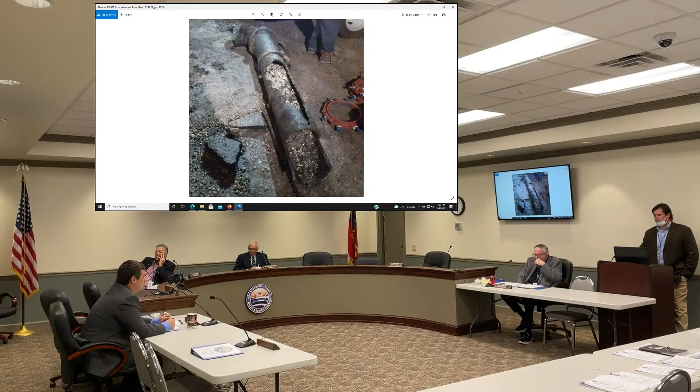But that's a picture from a couple of years ago, would you say? A year and a half ago?

How deep is the current force main? It's 4 feet, something like that. Does heavy equipment going down that road affect it? Yes, theoretically it would, assuming it's not compacted properly.

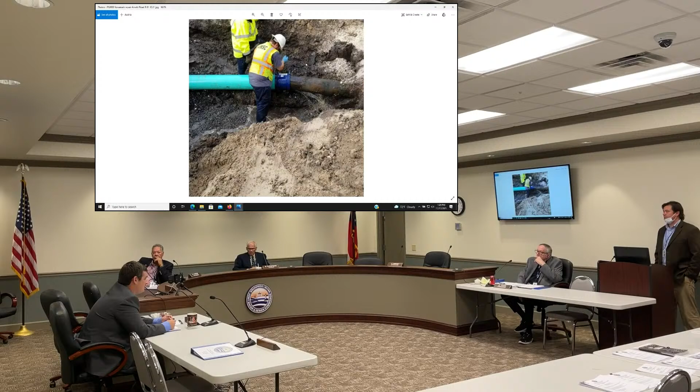Vibration on thin wall - that's from cast iron corrosion. This was most likely caused by corrosion issues, but of course all that vibration, knowing the shape it's in, is making more issues for us in that area.

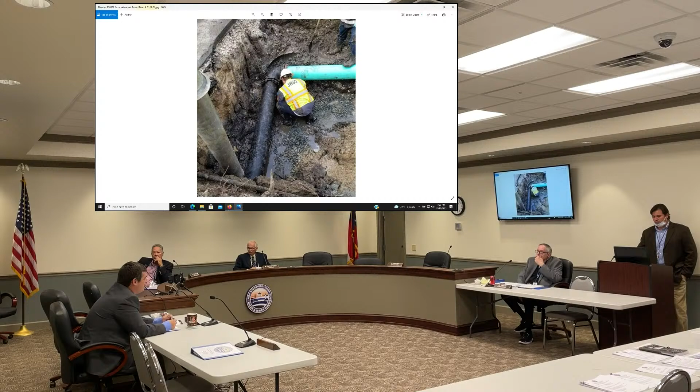Where are the breaks located? If you can pull it up - you see one right there. Pump station is right there. That patch is the most recent one that blew out - it's near Fiddler's. And then it actually blew out inside that patch, and we had to patch the patch.

Okay, what about if we send that smart ball through it? And see before we spend any more money on this. We could absolutely do that. I'm sure that Mr. Stewart, or I guess he's still doing those, would be happy to give us a price on that. Okay, before we continue our conversation, can we have a motion?

I'll make the motion. I'll move that Facilities Committee recommend the full commission reject the bid for IFB number 22-012 pump station 2002 force main replacement due to insufficient funds being allocated for the project. I'll second the motion. I think we need to revise that and just say reject the bid instead of all bids, since we only got one bid. Okay, I'll support that.

Is there another way that we could get this done? I think about working with contractors that we have on property now, and that we go to them and add scope to a project, because we have people mobilized already. Perhaps we could put the pencil to that and see if that's an option, to look at it and negotiate the cost for the scope change on another project. And perhaps if we can do that, my thoughts are if we're successful, we could still keep this on track in terms of timing to get it done before spring.

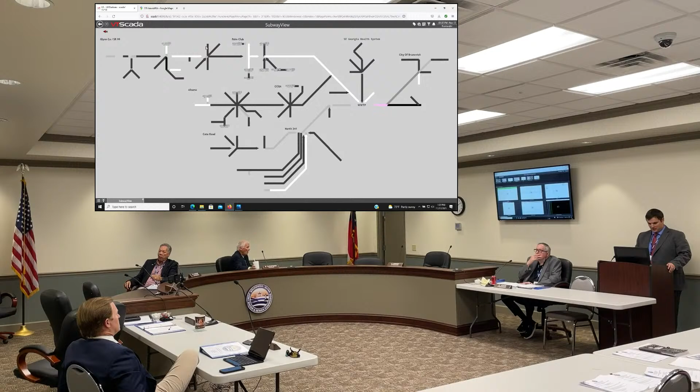So this is the full screen here. Then I want to show you this. We have what's called a subway setup, and it looks like a subway map. This shows you the layout of our system, and again anything that's in white is pumping, including those force mains. So we can tell exactly where flow is going through the force mains in the system right now.

And why is that important? Well, if you have something occur downstream, particularly if you've got newer staff online and they don't know the system very well about what needs to be cut off, if we know downstream there's issues, we can follow this back upstream and turn off stations that are necessary.

It also helps explain why when we upgrade pump stations, we take into account, like station 4028, there's 3 or 4 pump stations that pump into that, so we account for all that when sizing these. If we go into individual pump stations, we have this for the whole system. This is the city in North Mainland, this one labeled SSI is St. Simons, and down here is South Mainland. We have a substantially smaller system at South Mainland, so we were able to fit it on this page and cut down the number of pages.

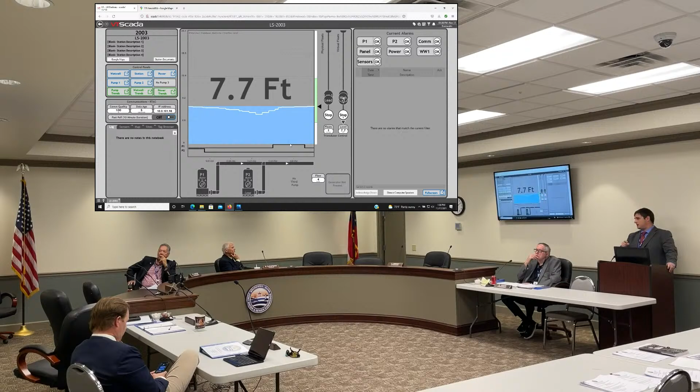You can see these pumps that are running currently and as such. Let me zoom in here to one of these pump stations as soon as I can find the one I know. Okay, pump station 2003, this is back in Oglethorpe Point.

If you go to every one of these pump stations, they all have individual pages that look like this. Some of them have radar devices, which this one has. You have floats as a backup, and we also have radar devices that tell us the exact flow. So there's currently 7.7 feet of water from the bottom of the wet well in that station.

Now what I can do is go into this pump, click on pump 1, and force it to run. This isn't very exciting because it takes a second to click in, but I'll override it, so I turn that pump on by hand, and in a minute you'll see this start to pump down. It takes some time for the communication to get there to turn it on, but you'll see this number start to drop.

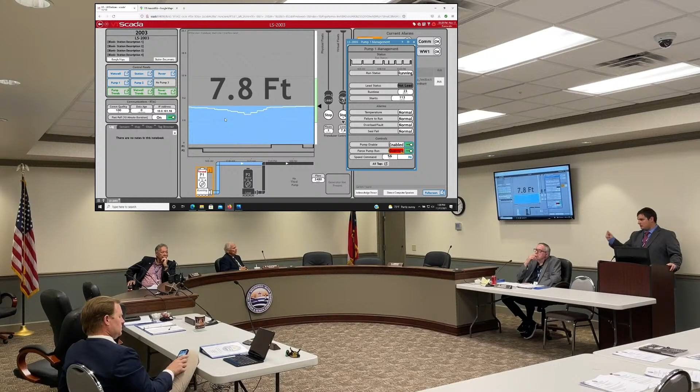Is this cellular-based communication? All cellular-based. Every station has a cellular modem at it. Previously the way we did our communication was via radio, so they all go to one collector point. If a collector goes down, we may be blind for 15 stations. Now we would lose one station, not lose it, but we just wouldn't be able to see one instead of not being able to see 15 at one time. So we pay a cellular phone bill at each station, yes sir.

So you see it's already dropping, and we can see that. This white line here is actually a trend line that shows what it's doing, so you can see the flow as it comes up and down throughout the day. So everything's real time then? Everything's real time. It does a polling loop every 15 minutes, so even if you don't force it to change, it will get an update at least every 15 minutes.

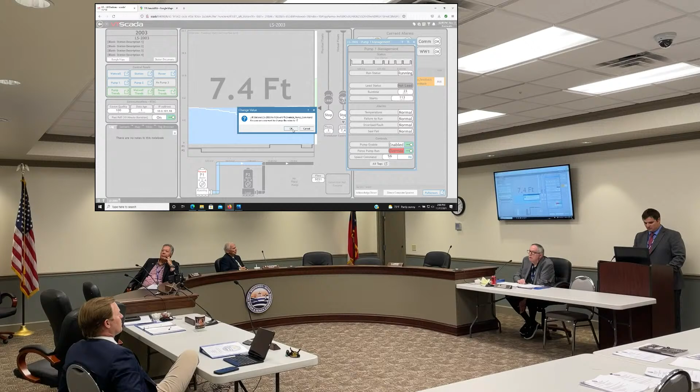Okay, let me shut this off before I forget and burn up a pump here. But with that being said, we did talk about this trend line. One thing Commissioner Terpsey, you ask frequently in these meetings is, what about run times? Well currently, getting run times out of our system, we set them up on Friday and come back Monday and hope that the runtime data has actually downloaded.

On this one here, I can click on this pump trends button, and there's the runtime already. It tells me this is for one day. In the past day, this pump has run 3 hours and 46 minutes, and this pump has run 3 hours and 39 minutes. I can also see 15 starts and 14 starts - starts are also critical for motor life. Now this station hasn't been on as long on VTScada, so we won't have extensive data, but say I want to know for the last 2 weeks, I can tell the average, that 0.2 or 0.27, over a 24-hour period, 20% of the day it's been on, 27% of the day it's been on, so you can back out on average what that runtime is for that station.

So we have all those levels of data, and the ones with radars on the wet well, we can actually get wet well trends. We can see the flow actually go in, the level go up and down in the station as flow comes in. Now this one has a pretty rapid up and down because we actually run the level a little higher in this station to avoid air stripping back in that neighborhood. So some of them you would see much longer fill cycles and pump cycles than this - this one is short cycled because of that. But just to keep, this is a note there.

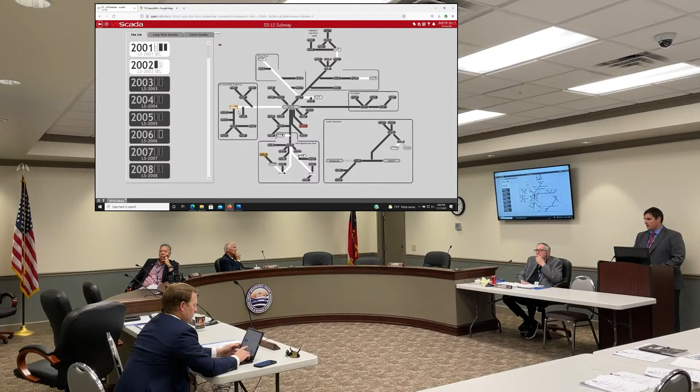If we go to this station again, it has an ongoing station logbook. So if a crew member goes out to a station, he can put in there what he did while he was out there. So next time somebody's out there at 1 in the morning when we have an alarm, he can look up and see what happened last time he was there. I'm glad I pulled this one up because it doesn't appear to be anything misspelled or inappropriate on the station logbook here.

But we can do these, we are going to fill these in. We can have descriptions here of what the pump manufacturer is, what the flow rate is, what the set points are. We can also pull up where it is on the map. Those are being filled out, they're being GPSed as part of this project, and those are going to be uploaded. So we'll be able to have all that level of information.

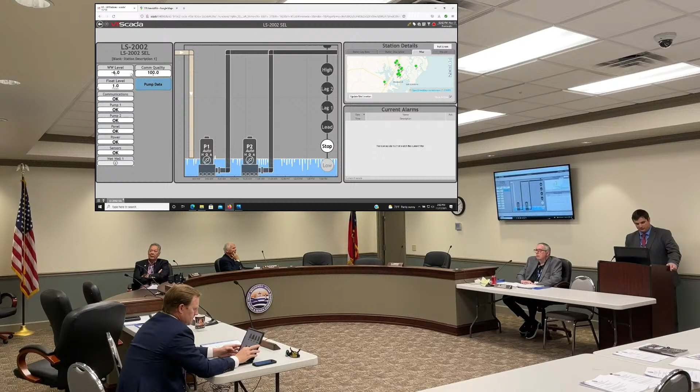Does the person doing the work have to log into the system so you know who did it? Yes. So see here, T. Dobbs and Jones. T. Dobbs is Timothy Dobbs, and Jones is Dion Jones. Those are lift station techs that we have.

So it's recorded who did it, and you can also put sticky notes through the system, kind of like you have on your desktop computer. It notes if we had a trend that got out of whack. We can put a sticky note so when somebody's going back through and says, what happened here? Somebody has noted what happened here is we were working on it, we had to shut the station down so the level got up. So we know all that historical information.

So what about overall in the system, what about alerts? Does the system send out alerts for issues? Yes. So right here, these are all the current active alarms we have in our system. The flashing red lights mean there's an alarm. They're currently still doing work on several of these stations, so you'll see some alarms throughout the day. That's going to happen. And I'm not going to acknowledge these because they may need to know that that's going on.

But you'll see all these alarms, and these alarms actually dial out through our cell phone system. Whoever's on call, which changes each week, gets a phone call. If they don't respond in a time period, I believe 5 or 15 minutes, it'll call somebody else. And if they don't respond, it'll call somebody else. It will get to me if you go through 5 people. I wonder where you were. But knock on wood, mine hasn't rang for VTScada yet. So if we do have an issue, it calls multiple people so that we don't miss out on alarms.

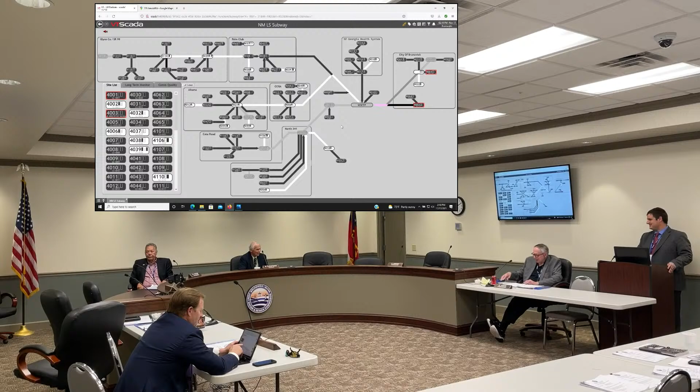Thank you, Andrew. Yes, sir. Can we amend the motion to add executive session this time so Charlie can... well, he's going to be here for 3 o'clock as well. Is he? Yes, sir. So, okay, you got him for the rest of the afternoon.

All right, the next item is the water pollution control plant flows report. Mr. Burris? Yes, sir, let me pull this up here.

Water pollution control plant report here at Academy Creek. It was a fairly normal month as far as rainfall, so the average flow leaving the plant at Academy was 7 million gallons. Plant was well within compliance on all of our parameters, with 96% removal of BOD and TSS.

And that's ongoing with 2 of the clarifiers out for existing rehab from the project, one of the aeration basins not being able to be used if necessary because they were doing some work on that, and portions of the plant are currently bypassed due to the ongoing project work.

So you'll see an NA over here on the water meter report. One of the casualties of our plant project was a destroyed water meter, so we did not have adequate water meter readings for the plant for the month, but that has since been replaced.

But you'll see a lot of sludge going to the landfill. We were having some problems with our dryer, and Mr. Alvin got it fixed, and he has been making space in the digesters ever since, draining them pretty good, trying to get that through.

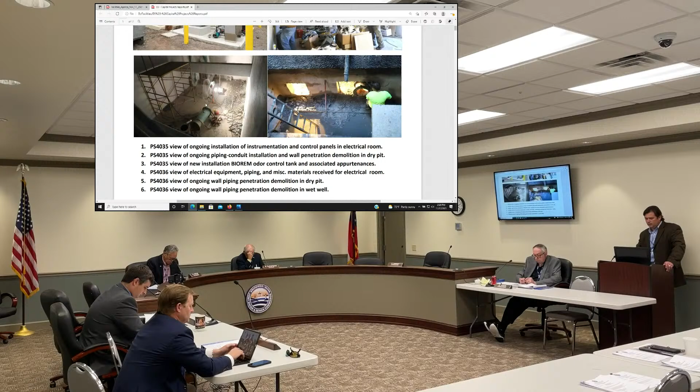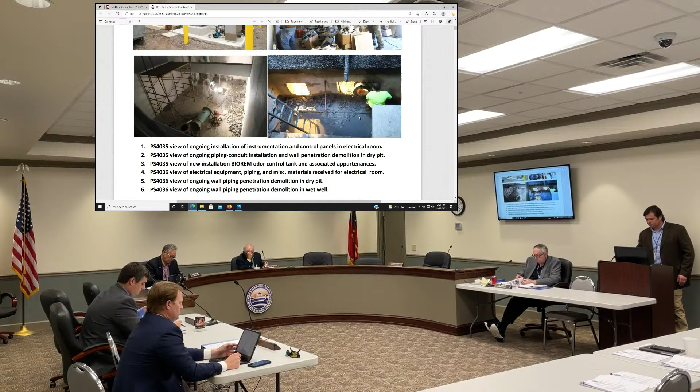Another room inside, the guys working on cleaning up in there. Another shot down in the pump room of 36, down at the very bottom, and they're also doing some demo there at 36. Pump station 4036 is at the end of B&W Grade Road off of Jesup, Old Jesup. So we're cleaning out the wet wells, getting a lot of the old concrete structure out of there, and rejuvenating those.

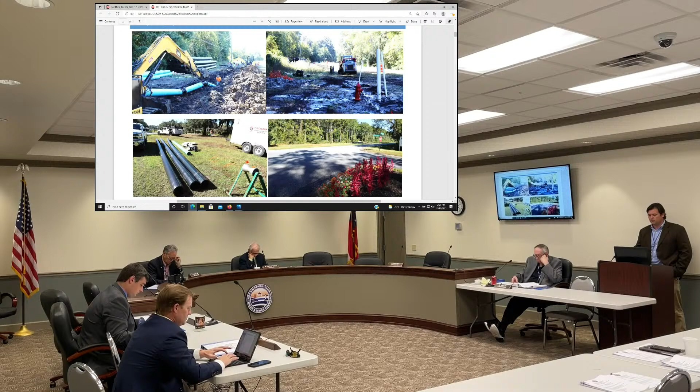Sister project to 702 is the force main installation on Harry Driggers Road. All of the open cut segments are in the ground now, and there's just a couple segments to go back and drill. The contractor, TB Landmark, their large rig, I think a 100-ton rig, arrived today. If you go out there, you'll see that rig. TB Landmark is also going to make a couple directional drills for our water line project.

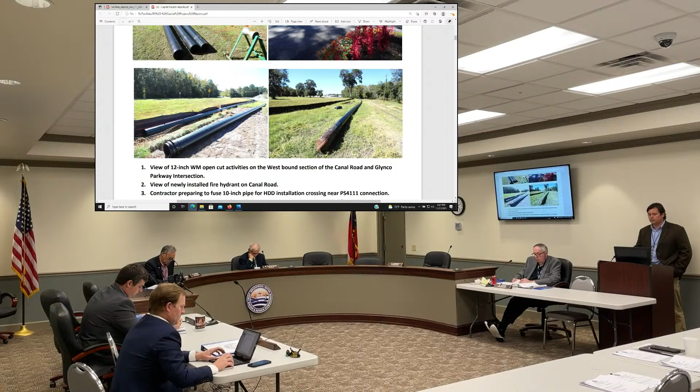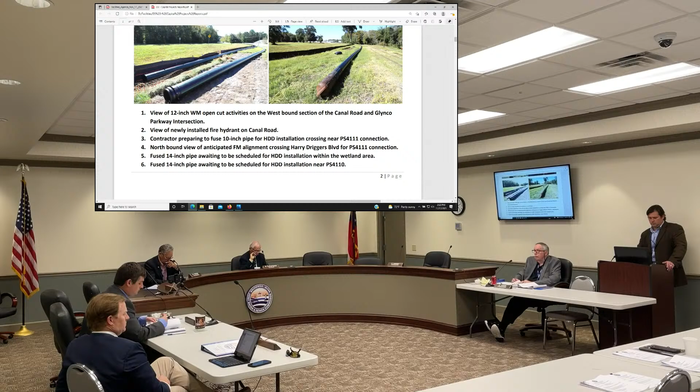For the water main installation, if you've been in that area, you've seen a detour on Canal Road for local traffic only. That detour is going to sunset essentially - today's the last day they'll be using it. They'll have one more single lane closure in about 2 weeks for the final tie-in down at Gateway to tie the force main in. So a lot of activity in that area.

Pump station 4003, project 703, is substantially complete and in operation. We are whittling through the last couple punch list items and working diligently with the engineer of record to close that out. That station's in good shape - it's essentially a brand new pump station.

Actually, I'd call this a suction lift station - this is an actual lift station. That's a shot of the pumps there, Gorman Rupp pumps, which are actually suction lift pumps, and the new interior of the dry pit side. Again, here just like at 4035 and 36, this wall is the interface between the dry side where the pumps are and the wet side where the wastewater is. That's the wet well on the other side - well, excuse me, this one actually goes to a new structure outside of the original wet well structure.

Project 704, Canal Road, Glynco 12-inch water main. TB Landmark is also installing 2 casings underneath the FLETC back driveways for us, and they'll be doing that very soon. Now that they've got their 100-ton rig here, they can use the same rig to do that. The rest of the open cut installation is done by in-house forces, water distribution.

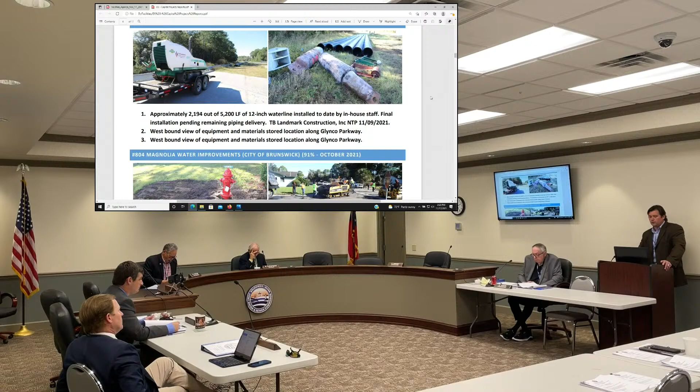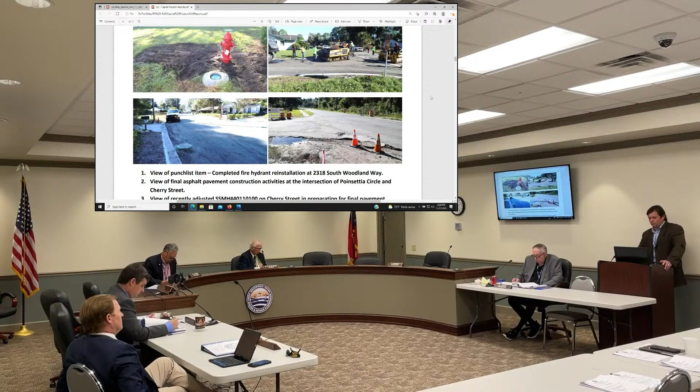Magnolia Water Improvements, JWSC activity with this project is complete. We are just waiting on final record drawings and final pay application from the City of Brunswick. The contract is actually between the contractor and the City of Brunswick, and we reimburse the City of Brunswick for expenses, our portion of the project.

City of Brunswick is going to continue with the storm and roadway improvements in Magnolia. They have the funding to do that now, and all of Magnolia Park will have new roadways out there when they're complete.

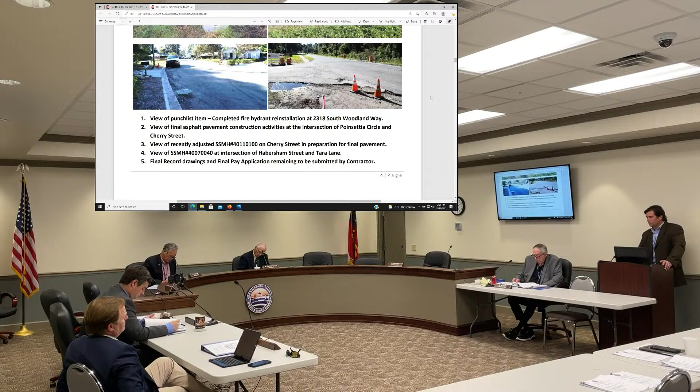Okay, Academy Creek, Mr. Burrows. Yes, sir. We've got photos there of the new sludge offloading facility. The equipment for the live bottom bin is supposed to be delivered this week. We've been getting the 2-week delay every 2 weeks, so we'll see when that actually shows up.

On the right there, you see the filters. Again, the filters are ready to go. We just can't get the water over there to them because we can't get the gates in to divert the water. So you can see the filters there. They're covered up. That material should not be just left out in the sun, so they've tarped that cloth material to make sure that doesn't occur.

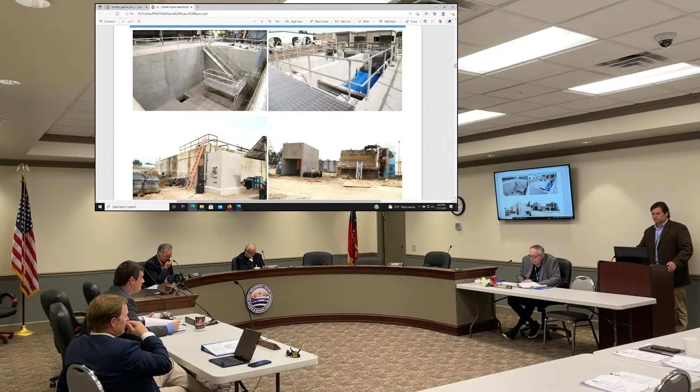Grating is installed, and they're going to come back once the canopy gets there. There'll be a canopy over the top of that to keep the sun out of there, and also give a place for our guys to get out of the sun when they're doing their work.

Down on the bottom there, AB1 can't be used right now because they've been building that little box off the side so that we can actually return sludge into AB1. On the picture to the right, that box that's about half torn down now is currently where the RAS for AB1 comes back to. That box is going to be completely done away with when they finish the box to the left. So we had to modify AB1 to put that flow in there so that it can be used now, but it was being formed up. We had to cut a hole in the side of the wall to allow that to occur.

If you haven't been down there, our contractor, Ruby Collins, does fantastic concrete work. It's got a very nice finish on that concrete structure.

There's the new splitter box, and where you see those gentlemen standing next to those 30-inch pipes, those pipes have now been extended past the existing splitter box and, as of yesterday, were about to make the turn. They did run into an unexpected electrical duct bank that is in the way that we're having to work around.

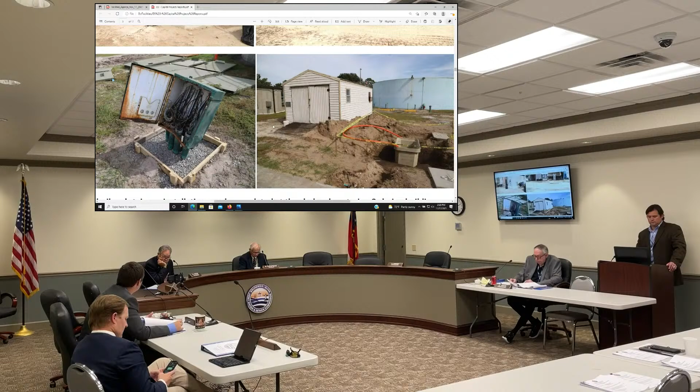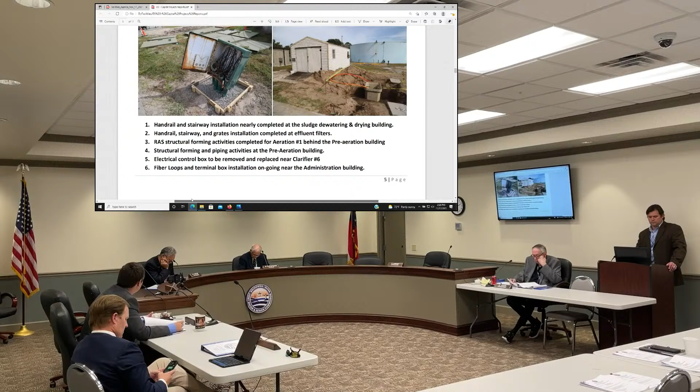And then you see, well, that's one of the electrical panels that's being replaced. As you can see there on the left, that one probably needed to go. But that's being replaced. The electrical contractor has been rapidly installing a fiber optic loop around the facility. There'll be a loop around the outside of the facility so we can drop fiber connections to all of our unit processes and bring them all into SCADA. That little box there is actually a fiber optic handhold, so that when we need to cut into the fiber optic or re-terminate to drop lines off, they go in that box instead of having to dig it all back up.

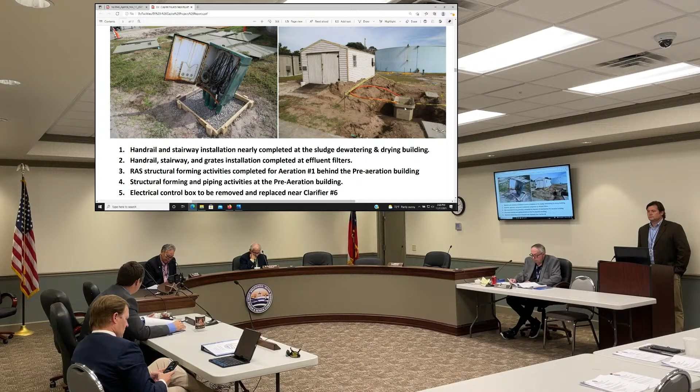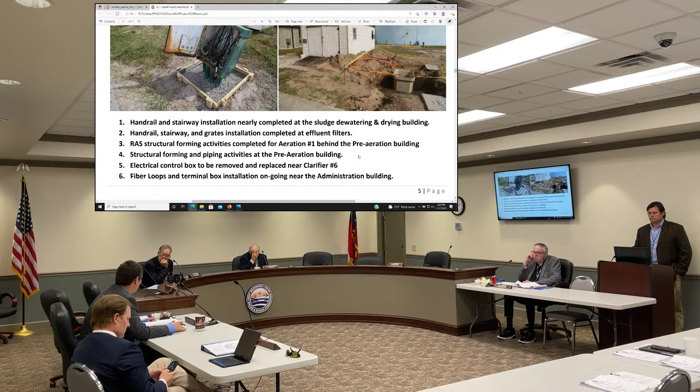We were notified they are now expecting end of March instead of end of February for their completion. They're contracted through the end of May, so they're still well within their contract time. But they're running out of things they can do until larger materials start showing up. They've renegotiated their schedule, changed things around, a vastly different way than what they were intending to do the project, but eventually things have got to start showing up.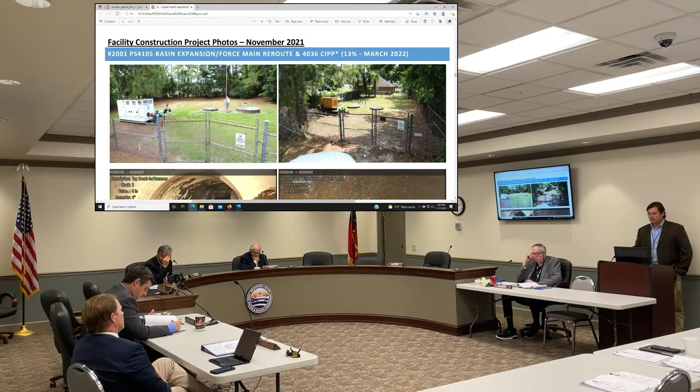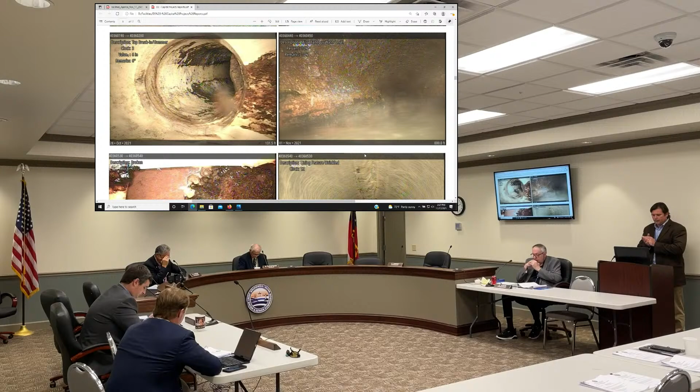Okay, next project, 2001, is the 4105 Basin reroute, which includes 4036 cured-in-place pipelining, which is ongoing. Matter of fact, they're out there right now putting liners in by Rich CPAC off of Glendale, and you can see them doing it right now. They're setting up bypasses for 2 shots tonight.

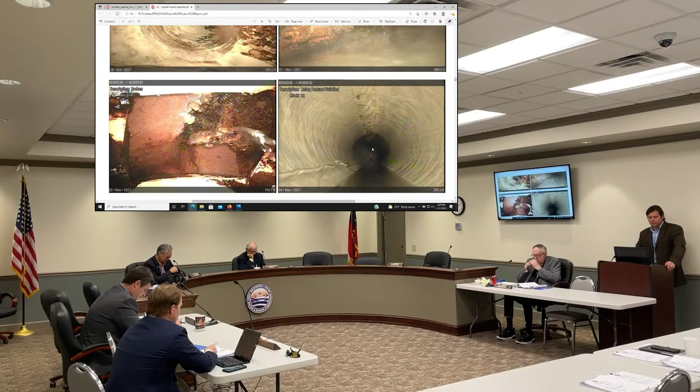So this is cleaning typical pipes. You can see some of the condition in the top 2 photos, then a finished pipe at the lower right-hand side.

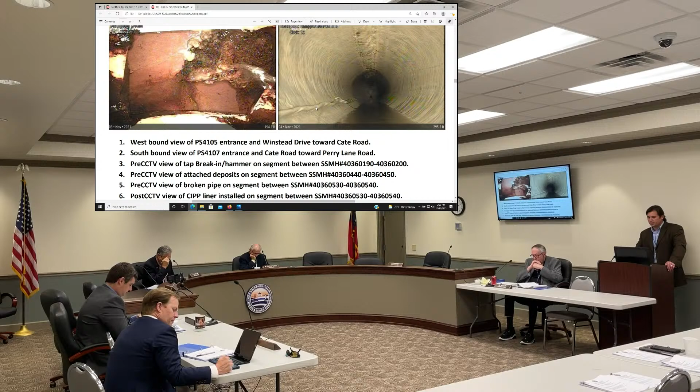You can see one of the reasons, including this picture, is the wrinkle that you can see in there. That happens. It's not functionally terrible. As long as it's not in the very bottom of the flow line, it generally does not cause an issue, and the benefit to the new liner, the slick coating on the inside, now outweighs that, plus the structural benefits. And we ever line force mains?

We have not lined a force main here before. I know it's been done elsewhere. I think one of the main issues with lining a force main would be the length of some of our force mains, which would make that impossible. What about Arnold Road, though? We might could line that, thinking out loud here, but they wouldn't be able to make the turn. It'd have to be a straight shot, or have to cut in a manhole.

I have a question about the pressurized manhole. On that picture in the bottom right with that pipe that's already been lined, what's the typical flow? Would the pipe be half full when the flow is going? A little less than half full normally. At high flow events, it'd get up to about 80% full. The wet flow you see right there is actually probably standing water from where you see the jetter spray head back in the back, following that, no flow.

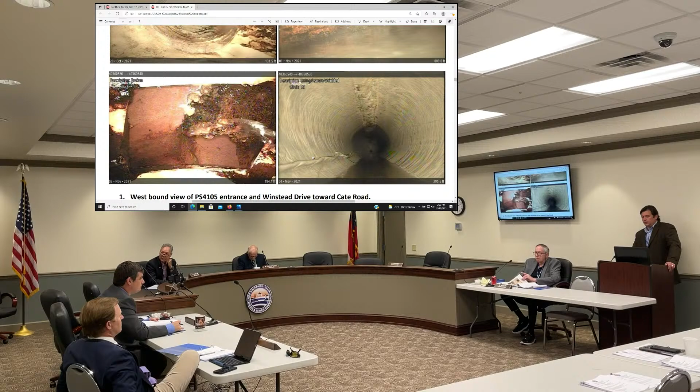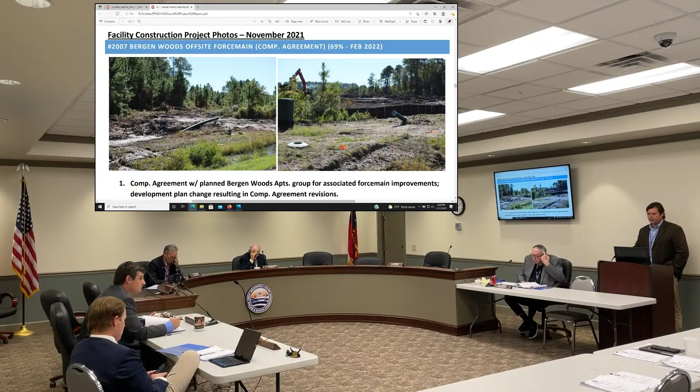Bergen Woods Offsite Force Main is a comprehensive agreement with the developers of Bergen Woods apartment complex off the spur, just south of the safety complex. The force main is in the ground. We're just waiting for the contractor to make the final connection to the manhole on Cate Road, and also install the fittings to facilitate connection from the safety complex pump station 4116, and for Bergen Woods when they're ready to connect with their pump station. You can see the land clearing going on immediately behind our project where they're going to put that facility. They're still in the development review process with Glynn County, but they're wrapping up their construction plans for approval.

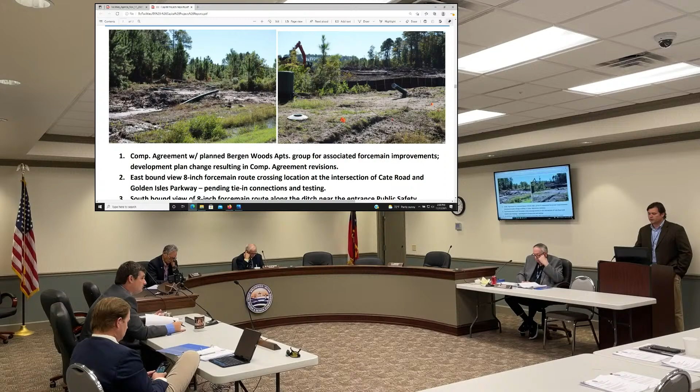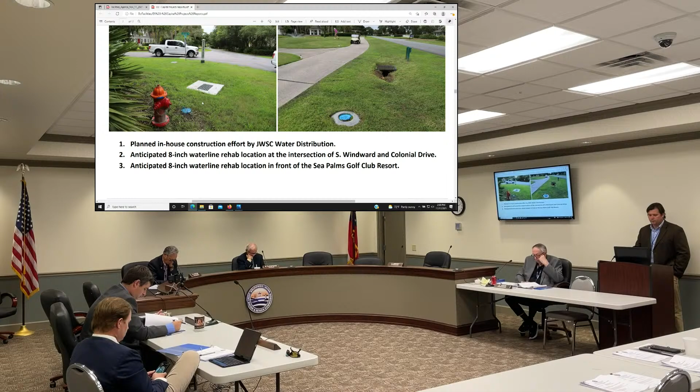Sea Palms, not much to report here. There'll be some in-house efforts to replace waterline, rehab, and relocations within Sea Palms.

Oak Grove Force Main, this was a comprehensive agreement entered with the developer of some planned residential units on the western side of Oak Grove Island. Their intent was to extend a force main through the main thoroughfare of Oak Grove and reach the public system to discharge to. Bids were received on this, and we've talked to the engineer and owner's rep, who are still determining which way they want to go with this project, since pricing came in around $2 million.

Did we take bids on that? Yes, sir, it was publicly bid. We do hope they decide to move forward with the project, because that opens up a large number of potential customers for joint water and sewer. Who are the other bidders? TB, Seaboard, and did Popco do this one too? Popco may go on that one as well.

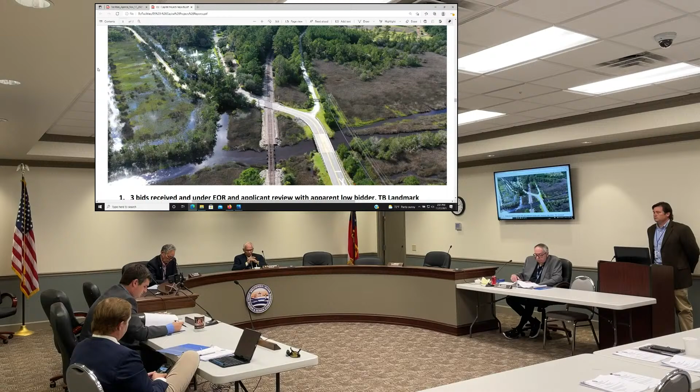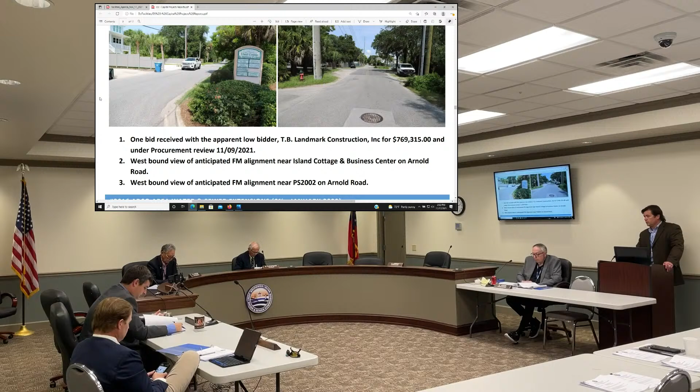PS2002 Force Main, we spoke about this a little bit earlier. This is where we received bids and facilities, as you recommended, for the full commission to consider taking another look at that project. Came in at $770,000, and as we discussed before, tight right of way, so perhaps we'll do a little investigation with smart ball technology. We'll explore that for sure.

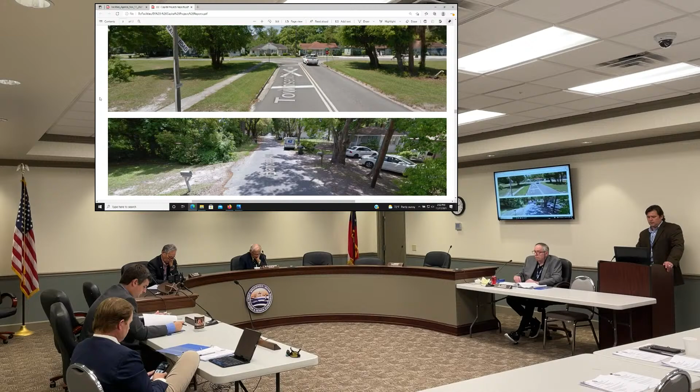Arco area water and sewer extensions, we spoke about that as well. Looking forward to that project hitting the ground in the beginning.

Community Road sewer expansion. We're currently exploring the necessary easements required per the engineer's design, and taking a look at this in discussions with the engineer, and any other options that we can do with this project. That's going to open up the gravity service to the commercial district within Community Road.

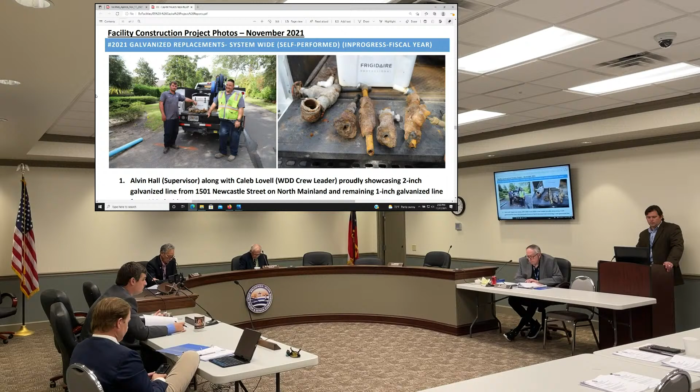Galvanized replacements, in-house crew, Caleb and Alvin there, and just an assortment of some of the materials they pull out of the ground. You can see the corrosion in our soils shows no mercy, especially on dissimilar metals when they're in contact with each other, like galvanized fittings and brass and iron fittings, that type of thing.

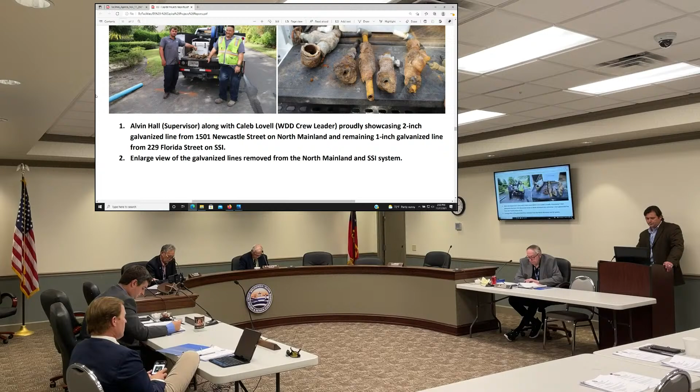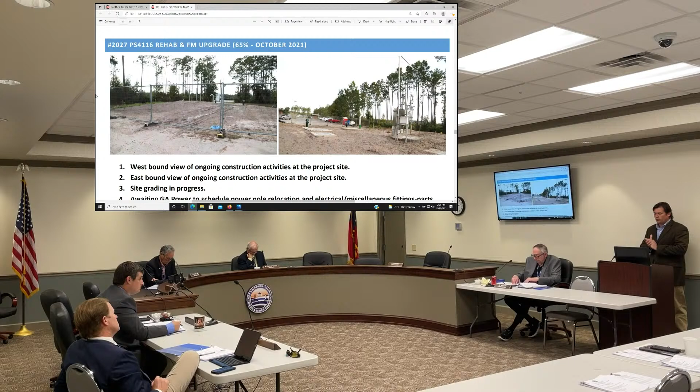Pump Station 4116 rehab, force main upgrade, safety complex. That project is essentially on hold, just waiting for final electrical components to arrive and get those installed. We're going to do a startup and power service relocation, which we're going to provide.

I think the original pole was a 6x6. We're going to go with an 8-inch true service pole to current Georgia Power specs. And the site's been graded, actually brought in a bunch more dirt. Systems Pumping did that, a contractor that worked with us, and they just graded it out for us and did a great job. So the site looks really nice.

It's going to look real good when it's fenced in, a brand new pump station there. That serves the safety complex, a vital asset for the community here. If you go out there, they currently have a security fence around the whole property, not just our pump station.

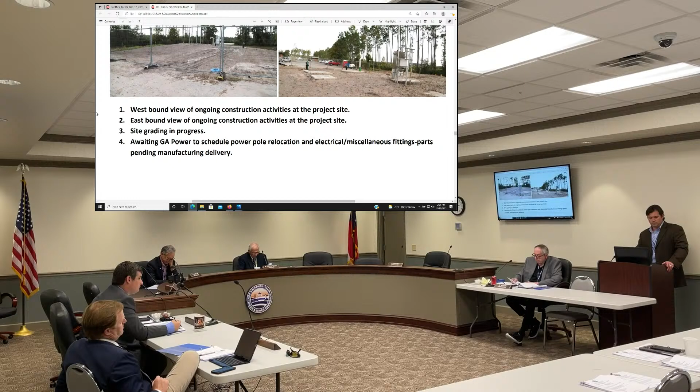We had a lot of them on St. Simon's, a whole bunch. What is the end date on the overall project? We had that as a forecasted 4-year project, but now I'm absolutely escalating it. They suggest once they get to full ramp up, they'll be able to do 100 meters a day.

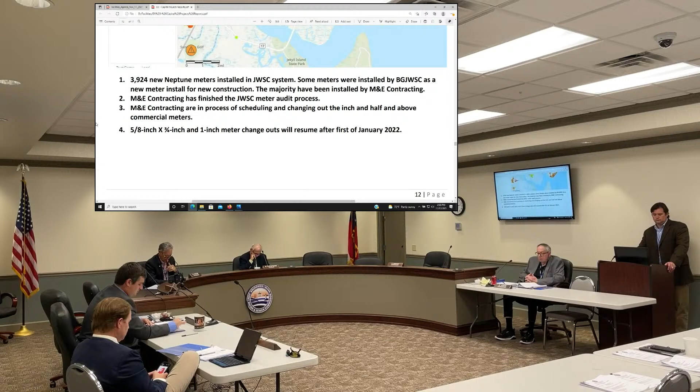Okay, and then priority basin clean and CCTV, that's in progress right now. So these are some sections here, you can see the numbers there on the bottom a little bit. 4035, of course, is the one being upgraded on Ross Road. Most of these are over in the Glen Haven area, right by Dunbar Creek. You can see some of the debris was in the lines.

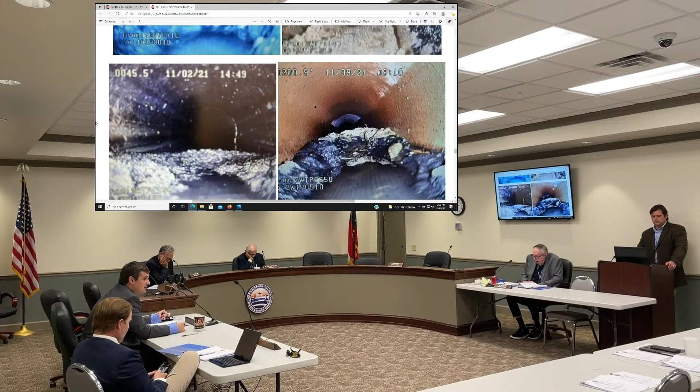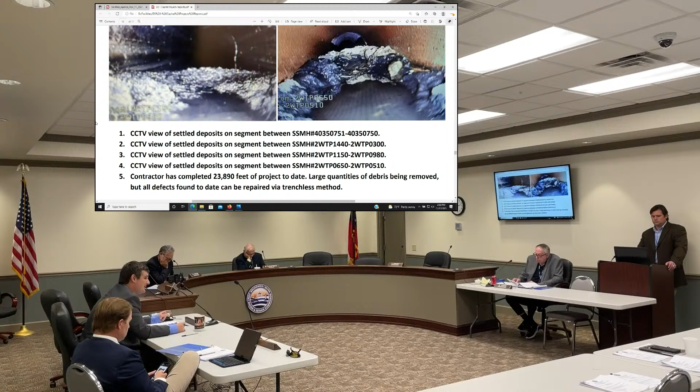They're cleaning these lines out and then televising them for us. It's about 71,000 feet of pipe in this contract. Southeast Pipe's been working on that. And one project that's started since we completed the project report is the Sea Palms West CIPP project. They're jetting a bunch of those lines trying to get them cleaned out. A lot of tuberculation in those old ductile iron lines.

We have found some issues that we are actively trying to determine how to best approach. Those lines are about 16 feet deep in there, and if we have to do point repairs, it's going to be very complicated. So we're examining our trenchless options. Some of the lines, in their current state, we would not be able to actually line. We're trying to look at this because you're getting sugar sand falling in as they pull a vacuum trying to clean it - more sand's falling in, you get sinkholes forming. So we're trying to figure out ways to grout the soil around it and stabilize it long enough that we can actually clean it and pull the bag through and line it.

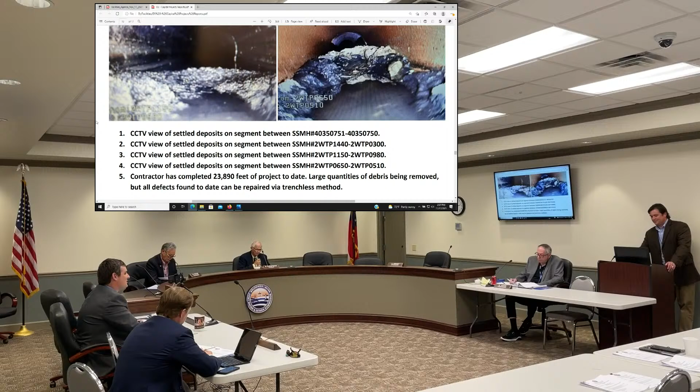As the contractor said, you didn't give me the easy ones, did you? But they are supposed to have their lining crews here - the cleaning crews are here now. The lining crews are supposed to be coming in the Monday after Thanksgiving.

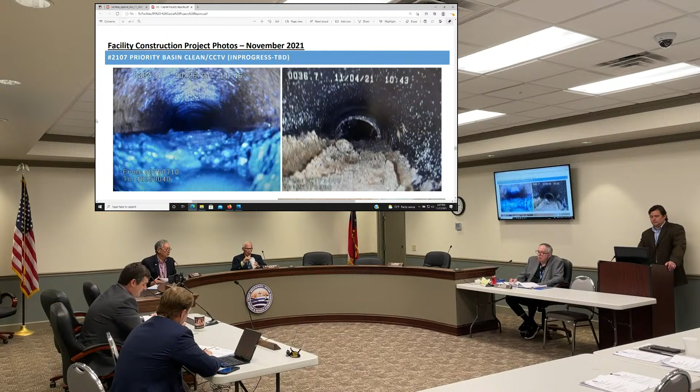So what causes the debris in the pipes like this? Usually this occurs during lower flow events - the velocity slows down in the line and stuff settles out. We didn't give you any after pictures, these are all pre-pictures, but all this stuff comes out of the line pretty easily. When you see the white sand, that's the problem - that means you need to start looking for a sinkhole somewhere, because that's the white sand sprinkling into the system. That's not good - you don't like to see the white sand. Black stuff's been in there for a while.

Okay, well that concludes the picture portion of the active projects. We'll have at least one more pump station, 4044, on the list next time, and hopefully we'll have some dedication surveys in hand from our folks at LEA over in Valdosta.

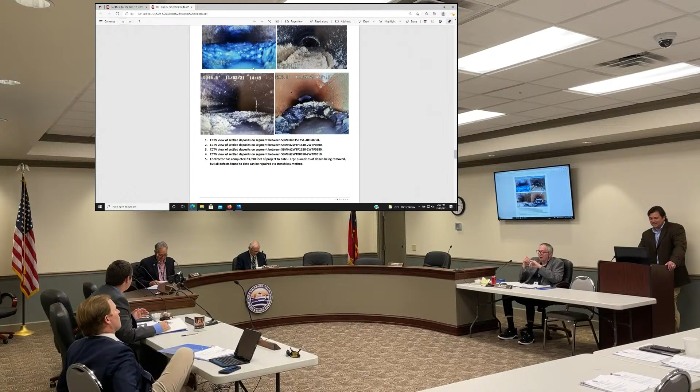Good reports. The pictures are looking prettier, except for the last two or three. We just gave you the pre-photos, that's it, because they're more exciting. That's right, the pretty pictures. Liners are boring to look at.

So, a lot of good projects going on. There's our Gantt chart, of course, as well. Then EVA, just to note, we're at 78% schedule compliance right now. Once the meter project kicks back off in earnest, that number should shoot up. I'm very encouraged that the indices continue to improve, and kudos to the entire team for making that happen.

Given a $66 million construction project overall, I'd say that's superb. Two years ago, we spent about $4.9 million on capital projects. Last year, we spent $16.7 million, and through today, we were at over $8.7 million for the year. So we're doing a lot more project work than what we were doing just a couple of years ago.

Andrew, tell us about the status of the generator project. Generator project with FEMA, we are working with purchasing to get the generator purchased separately. We've got one major generator on Academy Creek. We've got to figure out exactly where we're going to land it at. It's a 1,250 kW generator, so it takes up quite a lot of space.

And of course, at a wastewater plant, there's pipe everywhere in the ground, so we're trying to figure out the most successful way to locate that. But we've also been told by our electrical engineer and generator suppliers that we're looking at a minimum 6-month lead time to get generators delivered right now. So we are looking to purchase the generator separately to get them here and get them coming so that when we get a contractor on board, they're not having to just sit and wait for 6 months once the generators are ordered. It also takes a lot of the risk off the contractors for generator prices changing from when they bid to when they actually order them.